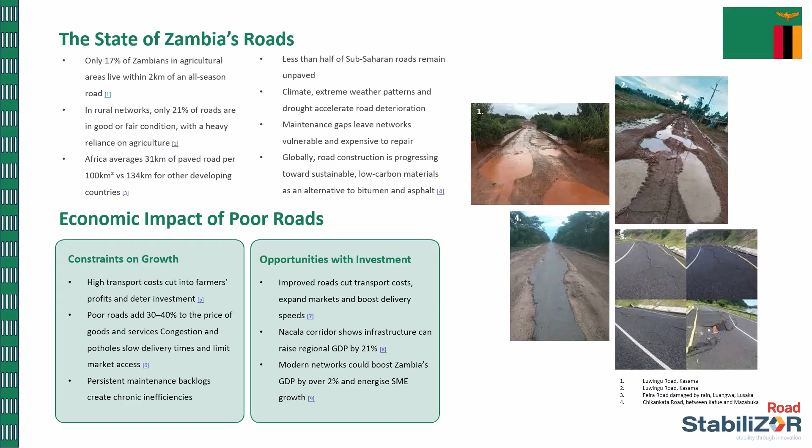However, the opportunity is equally clear. Improved road infrastructure reduces transport costs, increases delivery speeds, and expands markets. Evidence from regional corridors shows that infrastructure investment can increase regional GDP by more than 20%, while modern road networks can boost Zambia's overall GDP by over 2%, supporting SME growth and job creation.

The answer is clear: new reforms, new ways of working, and a faster, more streamlined and cost-effective solution when it comes to roads. Real-world case studies demonstrate the long-term performance of these solutions under different conditions and traffic demands, with RoadStabiliZOR being one of those opportunities.

Starting in Lubumbashi in the DRC, these images show roads constructed in 2008 carrying daily urban and industrial traffic. Despite challenging soils and climate conditions, the stabilized road surfaces remained intact with minimal dust, erosion or structural failure over time. The Dullstroom case study in Mpumalanga, South Africa is particularly important as it provides a 6-year performance comparison. The road was treated in 2007 and by 2013 the stabilized running surface remained structurally sound and trafficable.

What is especially telling is the contrast visible in the images. The stabilized road section remained intact, while the untreated edges and surrounding material had eroded away over time due to water and environmental exposure. This clearly demonstrates that the stabilization process addressed the fundamental interaction between soil and water, rather than simply treating the surface.

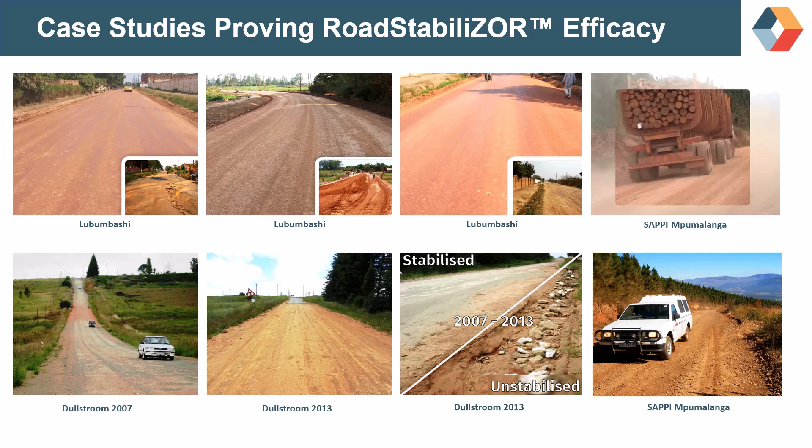The images from SAPPI's forestry road network in Mpumalanga further reinforce this point. These roads carried heavy timber haulage vehicles under high axle loads, yet the stabilized surfaces have consistently delivered durability, reduced dust, and lower maintenance requirements, even in high rainfall environments.

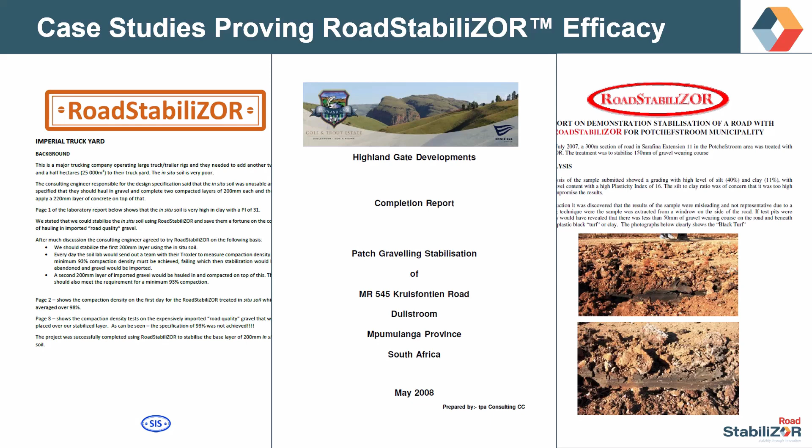The solution is supported by evidence that builds confidence through fully documented case studies, not concepts or pilot claims. Each project is backed by engineering reports, laboratory testing, and independent assessments, and is available for review and distribution. Together, they confirm that RoadStabiliZOR has been tested, measured and proven in real operating environments.

So what do we mean by soil stabilization, and how is it achieved? Stabilization is the treatment of soil, carried out through a controlled combination of water, chemistry and compaction. Firstly, water is used as a delivery mechanism, not as a binder. Through controlled moisture regulation, water ensures the stabilization agent is evenly distributed throughout the soil layer. Clay soils are naturally negatively charged and are made up of fine plate-like particles.

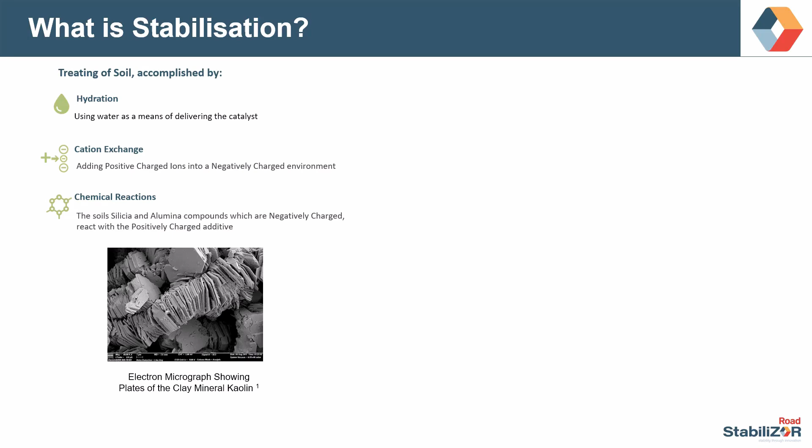In this image, we see clay as thin plate-like particles stacked on top of one another, creating an extremely large surface area. This surface area allows water electrostatic forces to dominate, which is why clay becomes unstable, weak and highly sensitive to moisture under traffic loads. These plates are loosely held together by weak opposing negative forces, which makes them sensitive to water and unstable under load.

When RoadStabiliZOR is introduced, it supplies positively charged ions into this negatively charged environment. This weakens the opposing forces between the clay plates, allowing them to be compacted more closely together. These reactions create a more stable soil structure that is less sensitive to moisture. The result is a soil environment that becomes highly receptive to compaction, enabling very high density and strength to be achieved using the existing in-situ material.

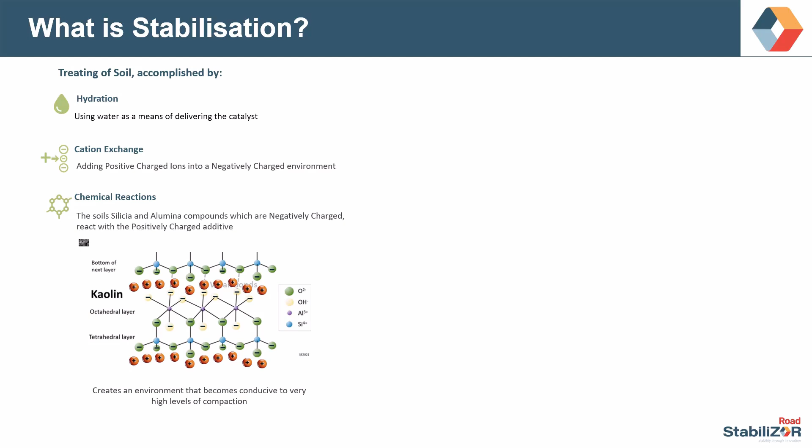So why is stabilization used, and why has it become a tried, tested and proven approach in road construction? The Code of Ethics of the National Society of Professional Engineers promotes that it is an engineer's responsibility to creatively problem-solve sustainable development using local resources while conserving and protecting environmental quality and the natural resource base essential for future development.

Soil stabilization allows engineers to work with naturally occurring in-situ materials rather than relying on the costly and disruptive import of external aggregates. This reduces logistics, costs, and dependency on third parties.

From a health and safety perspective, fewer truck movements and lower dust emissions result in cleaner air, safer travel, and improved community health. Economically, smoother and more durable roads improve productivity, reduce vehicle wear, and enable reliable delivery of goods and services. Stabilization also strengthens social connectivity. All-weather roads provide consistent access to schools, clinics, police services, and markets, empowering communities and improving quality of life.

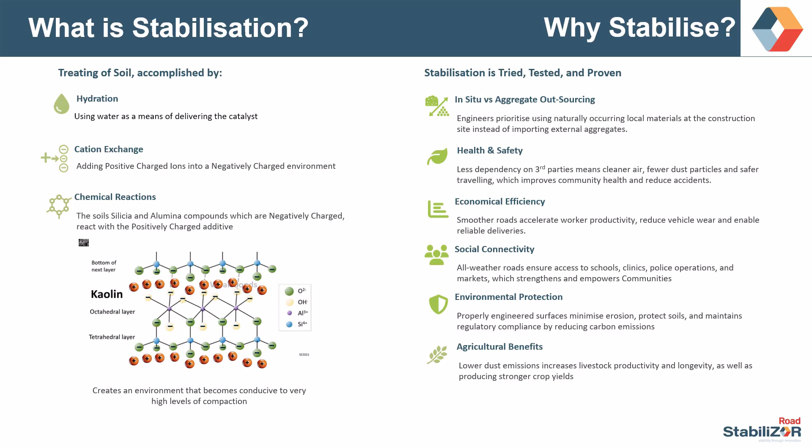Finally, stabilization supports environmental protection and agriculture. Properly engineered surfaces reduce erosion and dust, protect soils, and lower carbon emissions, which in turn improves livestock productivity and crop yields. So let's compare traditional road construction methods with a stabilized in-situ approach using RoadStabiliZOR.

Here, we see a conventional road structure. Traditional construction relies on multiple imported layers, crushed stone, selected fill and aggregates, all placed over weak, highly plastic in-situ clay. This approach comes with several disadvantages. Traditional construction is maintenance heavy, often inconsistent in quality, and highly dependent on water, particularly where cement and lime is used. It requires large volumes of raw materials that are expensive to transport, vulnerable to theft, and labor and equipment intensive.

Construction is also climate dependent, often limited to dry seasons, and costs can range from $300,000 to over $1 million per kilometer for asphalt roads. In addition, quarrying and cement production carry a significant environmental cost, with cement alone contributing around 7% of global CO2 emissions.

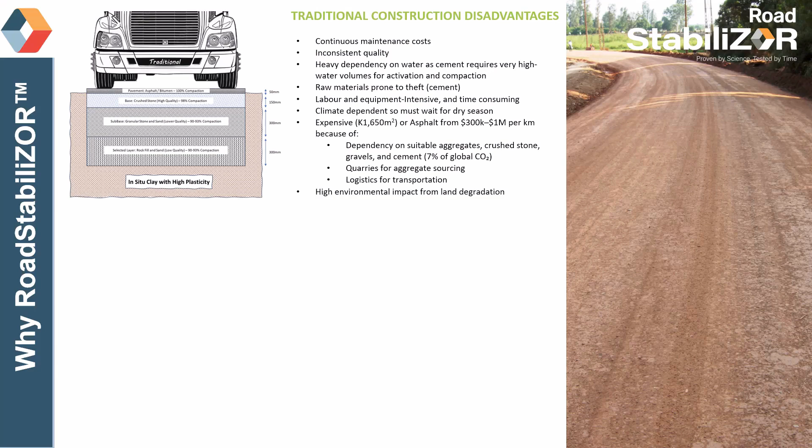In contrast, using the RoadStabiliZOR approach instead of importing aggregates, the existing in-situ clay is chemically stabilized, creating a strong, uniform road layer from materials already on site. This allows compaction levels of approximately 97% mod AASHTO with up to 40% reduction in water usage and no reliance on quarry aggregates or cement. Implementation time can be reduced by up to 80%, costs by up to 85%, and dust by up to 90%.

Over time, the stabilised road continues to gain strength through traffic-induced compaction, while maintenance costs are reduced by around 70%. Importantly, because there is no cement or imported aggregates, theft risk is effectively eliminated. The result is a road solution that's environmentally responsible, cost-effective, faster to deploy, and better suited to local conditions, delivering durability, safety, and long-term value using local materials.

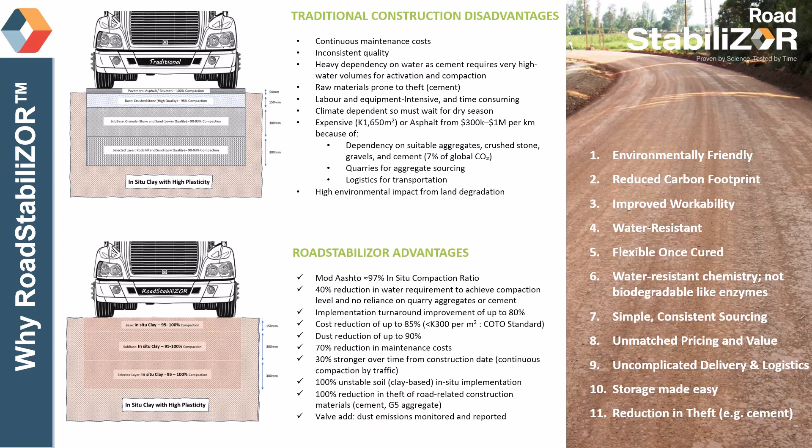RoadStabiliZOR replaces complexity with simplicity and imported cost with local capability. The implementation process, while technical in nature, can be taught through experience and local engagement. This results in road construction being delivered with communities, not just for them.

Here, you can see the physical construction steps, scarifying the existing surface, box cutting where required, and preparing the in-situ material to the correct design, mix, and grade. These are standard familiar construction activities that use locally available equipment and skills.

Then we move into dilution, blending, and compaction. RoadStabiliZOR is introduced through controlled moisture regulation, evenly blended into the existing soil and compacted to achieve the required density. This process is straightforward, repeatable, and does not rely on specialized or imported machinery. But the real value extends beyond construction.

Community-led road construction strengthens local ownership. When communities are involved, they see the road as their road, which promotes accountability, national esteem, and a self-recognized sense of dignity. This approach also enables training and skills transfer. Local teams are trained in basic construction practices, compaction control, drainage awareness, and routine inspection. This builds local contractor capacity, creates employment, and reduces long-term maintenance costs.

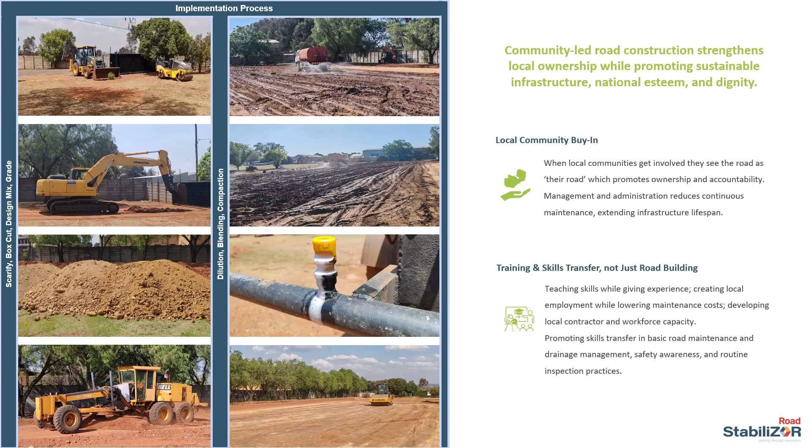In short, this is not just road building, it is capacity building. It delivers infrastructure while developing skills, strengthening communities, and extending the life of the road. The outcome is sustainable infrastructure that communities understand, maintain, and take pride in. So let's bring together two important considerations: real-world performance and formal engineering standards.

Observed 6 weeks after construction, you can see the implementation results, following more than 250 millimeters of rainfall. The surface remains intact, trafficable, and stable, and the distinction between treated and untreated areas is easily distinguishable, demonstrating that the stabilized layer is performing as intended under environmental stress.

Regarding road specification standards, for many years, organizations such as COTO, together with industry bodies, laboratories, and engineers, have developed formal standards and test frameworks for stabilized road materials, including the TRH-24 Upgrading of Unpaved Roads Technical Recommendations, focusing on nano-modified emulsions, or NMEs, and chemical stabilization technologies. These standards provide engineers and authorities with objective, repeatable criteria to assess performance, durability, and compliance.

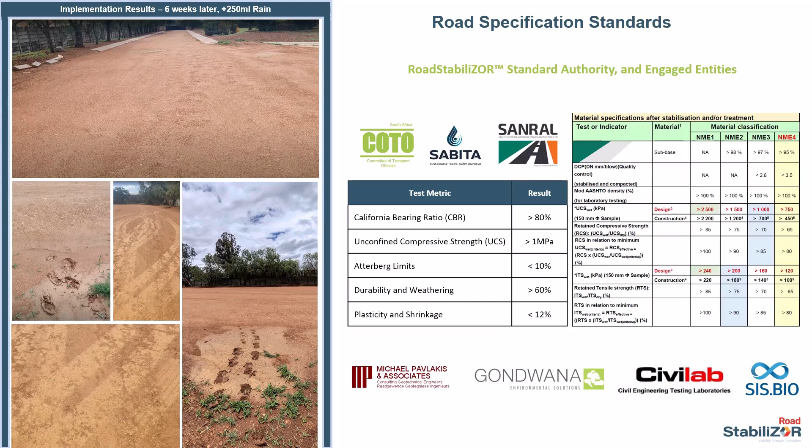Importantly, this is not theoretical. Early adopters, including consulting engineers, laboratories, and implementation partners, are already actively involved in testing, validating, and delivering these solutions in real environments. They are committed to sharing this knowledge because the objective extends beyond road construction. It is about community upliftment, achieved through sustainable, reliable, and affordable infrastructure technologies that create long-term value for people and economies. This is how innovation moves from standards to sites to lasting community impact.

Innovation is how we shape the future, and thought leadership is what turns big ideas into reality. If you want individuals to think big, give them something big to think about. By embracing pioneering solutions like RoadStabiliZOR, we can uplift communities, empower your citizens, and set a new standard for infrastructure that delivers on jobs, dignity, and growth.